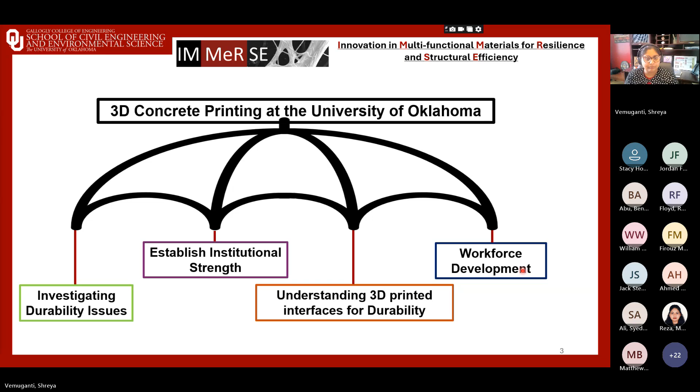Before diving into 3D printing, let's look at the current state of our infrastructure. You all know the updated ASCE Infrastructure Report Card 2025, and according to that, the report card emphasizes a C grade and D plus grade for bridges and roadways, respectively. These grades not only reflect aging systems struggling to meet functionality, but also emphasize service life expectations—meaning increasing maintenance costs, more frequent repairs, and in many cases, reduced resilience under modern demands. So we've seen these aging bridges and roadways, and they're graded poorly.

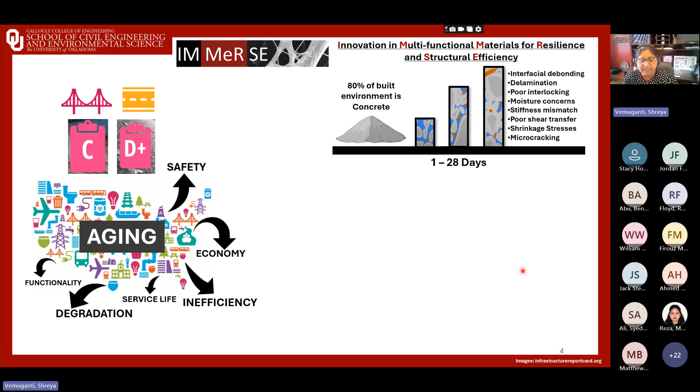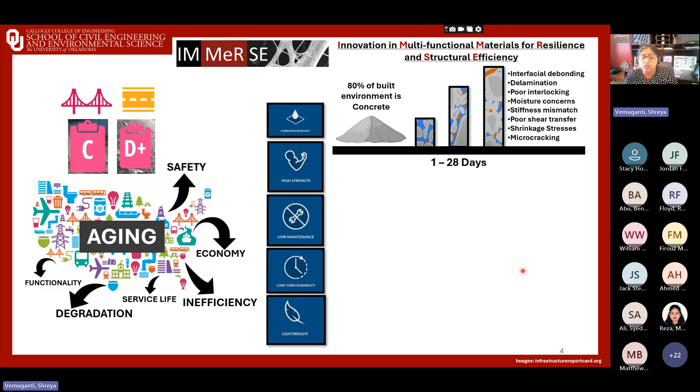One pathway forward for us is to use some advanced composite materials that are able to bring some unique advantages over traditional concrete and steel. We already have a very complicated material of concrete, which is 80% of our built environment, with tremendous complex networks inside of it. But we are bringing in some unique solutions through composite materials. These materials are corrosion resistant, high strength, lightweight, durable, and also require low maintenance. So the combination is particularly valuable for infrastructure.

We also see this in terms of the current applications of composite materials. For example, we have aerospace and automobile industries using these composites already. We also have reinforcing bars that we use in civil structures.

And the primary reason, if you look at what I'm showing here, which is called an Ashby chart, this high strength and low weight, so strength to weight versus stiffness to weight ratios, you'll see that what we call composites, highlighting glass fiber and carbon fiber reinforced composites, fall in this sweet spot compared to metals and traditional polymers. So they provide high performance, but also at much less weight.

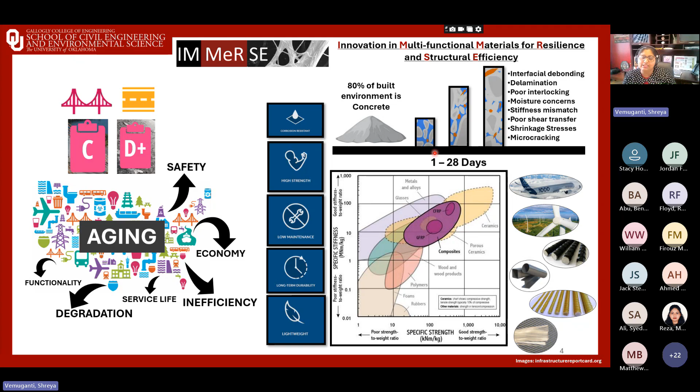And when civil infrastructure comes into consideration, corrosion resistance also becomes a really interesting advantage. So our research leverages these advantages by embedding composite reinforcement in concrete elements and studying how they are interacting with each other and how their behavior and responses change.

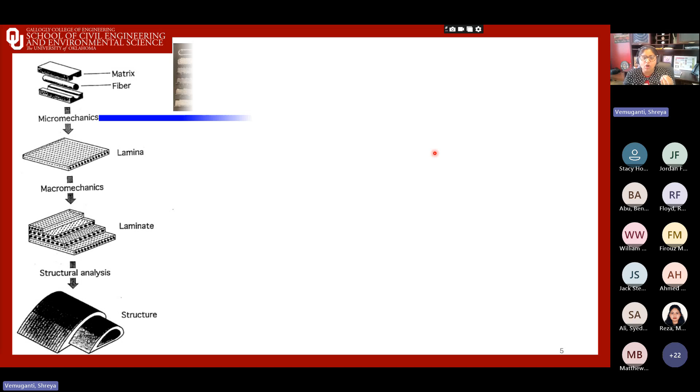So here's how we think, and when I say we, at IMMeRSE Lab and our team, how we think about our research. We are starting from the microscale of fibers and binders, and we enter the lamina and laminate levels, and ultimately up to the structural scale.

At micromechanics, at the micro scale, we look at how binders, fibers, also incorporation of nanomaterials like carbon nanotubes, how do they interact? We look at both experimental and computational modeling. What this helps us is to understand the fundamental mechanisms of strength and durability.

Then we enter the lamina and laminate kind of levels where we're moving up in scale. We investigate some reinforcement related relationships with concrete and how fabrics, grids, tapes, how can we embed these in order to improve bonding and load transfer between layers of these two unique materials.

We conduct some durability studies as well at the laminate levels, like freeze-thaw, chemical ingress, and some long-term corrosion durability setups. And at the structural analysis level, we actually look at beams, elements, and understand their performance under laboratory simulated but real world loading and environmental conditions.

This really allows us to connect what we learn at these micro and mesoscale levels all the way to the infrastructure system. So our team's strength is working across multiple scales, from material science fundamentals to large-scale structural behavior. And we integrate these into experiments and computational models.

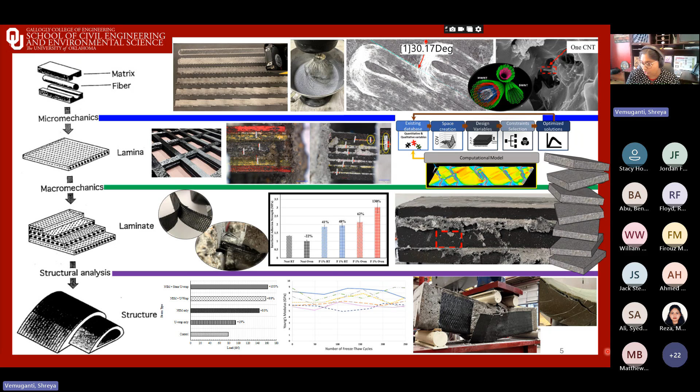So with that foundation, we apply these trends to one of the most pressing issues in 3D printed concrete, which is durability. Within durability, our emphasis is on the interface behavior, but I'll get into that more as we transition through the slides.

So I'd like to start before just diving into 3D printing. I want to introduce why it's important to understand the role of interfaces in these cementitious systems. Interfaces, either manually created or naturally existing, are often the weakest link in layered or layer on layer building concrete structures. And they could be the means to control some sort of long-term durability aspect.

So if you look at this picture I'm showing here, this is already a 3D printed structure where reinforcement is used within. There's already layer by layer building happening there, which creates these naturally occurring interfaces, which become also these cold joints.

So where we started essentially to investigate this problem is, as a first step, we created some manual interfaces. We made controlled specimens where we created manual interfaces. If you can see here, this is a very simple flexural specimen where we curated the mold such a way that we have this interface that we could incorporate some reinforcement within. So we simulated this layered construction process and we casted the concrete in stages. This allowed us to systematically study how these interfaces could be behaving.

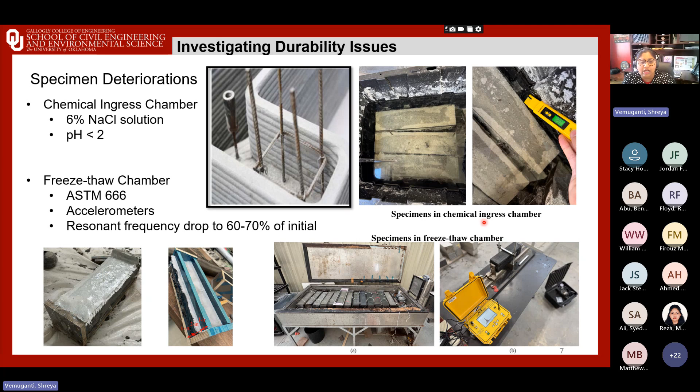These details matter because the pore size and geometry affect bonding with cement paste and also the resistance to crack growth. So we wanted to use these 3 different reinforcement strategies as variables to study how they impact the durability of these interfaces and eventually in 3D printing as well.

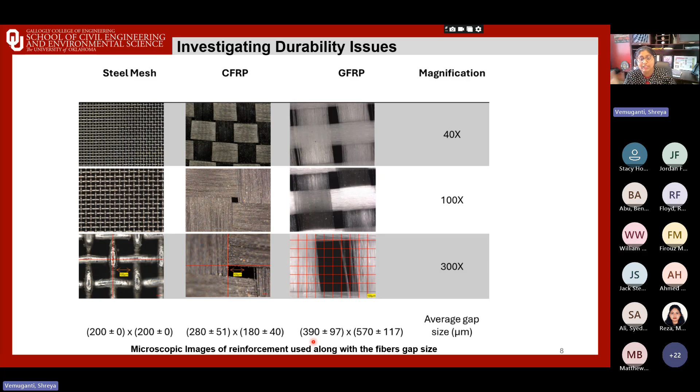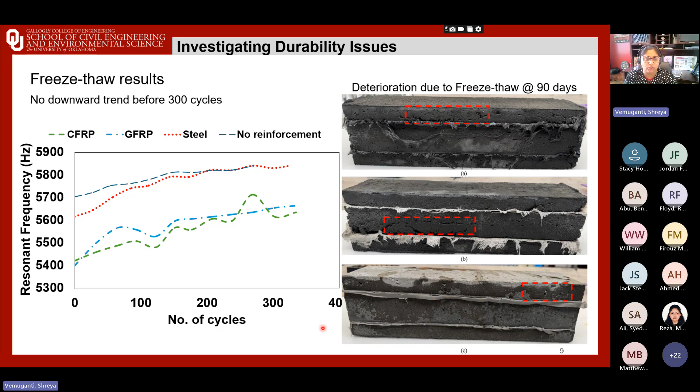These specimens observed some degradation in mechanical strength, especially GFRP. So the glass fiber reinforced polymer showed up to 56.5% reduction in the chemical ingress alone. This relates back to how chemical ingress can accelerate corrosion and deterioration at the composite concrete interface.

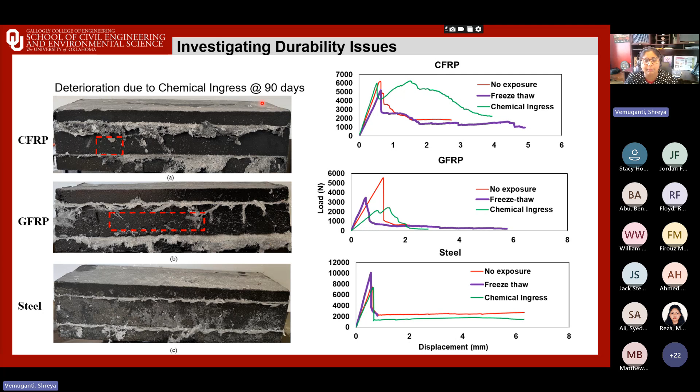Whether it's freeze-thaw or chemical ingress, the message we got from this pilot study is that these weak zones are able to inherently create deterioration mechanisms, or also accelerate them. It's important for us to understand how this affects us in the long term. These tests were conducted up to 90 days, about 3 months.

So taking this knowledge from studying these manually created interfaces under freeze-thaw and chemical ingress, the key lesson is that interfaces can control durability. Unlike traditionally cast concrete, which tends to encapsulate the reinforcement because you have that cover and the formwork, which protects your concrete during the setting and hardening process, printed elements are formwork free.

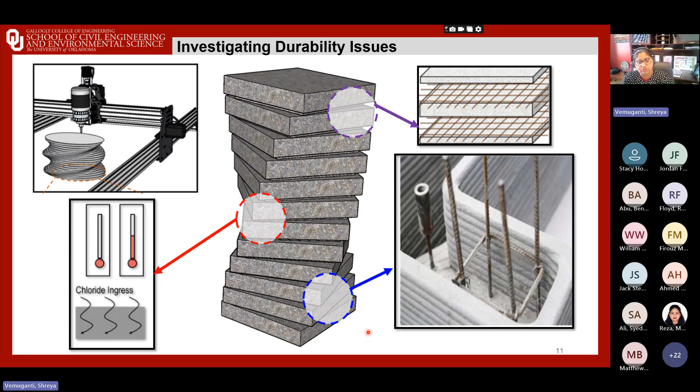So just to have this existing knowledge, problem statement, and objectives in one slide, what do we know so far? We've seen that chemical environments, and focusing here on chemical ingress, because with freeze and thaw we stopped at 300 cycles and there was not a lot of deterioration observed. So we are focusing on chemical ingress, and we might also look into freeze and thaw in our later reports.

But if we look at the existing knowledge, we've seen a reduced flexural performance by at least 56.5% in GFRP related reinforcements. So what is our problem statement? It's that 3D printed elements have naturally created interfaces or cold joints, and therefore the reinforcement incorporated at the interfaces between these successive layers may be at an increased risk of exposure to environmental conditions. So our objective is to establish this initiative, more like a program, an institutional concrete 3D printing program to investigate and mitigate these deterioration mechanisms, and understand in this particular environment what are the effects on mechanical, material, and also the durability attributes of these 3D printed elements.

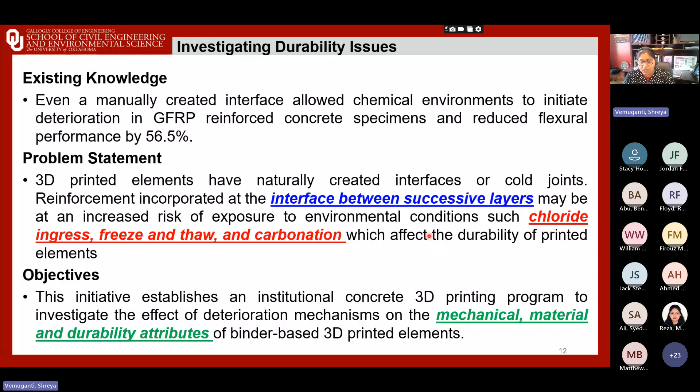So with that in mind, we'll now move into the theme of establishing institutional strength in 3D concrete printing. Here at the University of Oklahoma, we've established this particular concrete 3D printing lab in Fears Lab, and I will be running over some slides to explain that.

But why does this matter? This is not just about individual projects, but more towards building a program, and with the right tools, facilities, and collaborations that can make OU a hub for concrete printing in transportation and other infrastructure. By investing in these capabilities, equipment, testing frameworks, and partnerships, we aim to position ourselves to add to the scientific knowledge of this emerging field.

So in the next few slides, I'll go over how we created that foundation. If you already are an expert in concrete 3D printing, I hope to learn from you. If you want to know more about concrete 3D printing, I think these next few slides will help you get some interest in that. Okay, so I'm really starting from the basics.

So how did we acquire the 3D printer? We built this capacity at OU through the Strategic Equipment Investment Program. This is a VPRP initiative which supports some strategic equipment, and I'm thankful to the faculty across major schools, including civil engineering and environmental science, who collaborated on this proposal and acquired this particular equipment.

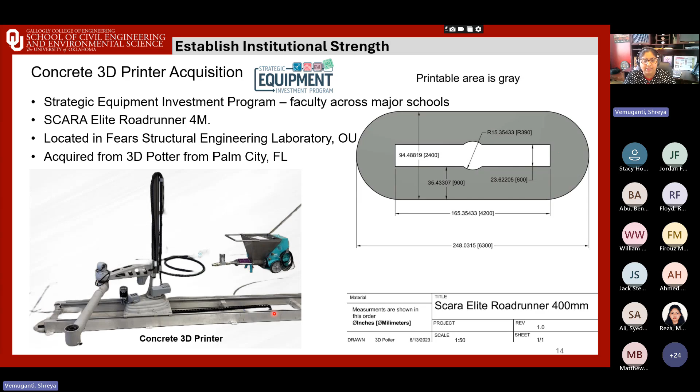So if you look at the print area here, we have about 20 feet of print area. You see in gray is the print area, and the white area is actually where the printer is situated. So we're looking at about a 5-foot radius from where the printer is located around. It can print this way and this way, and it runs on this particular rail that you see.

Really going into step one, it was unboxing. When it was delivered, the printer first arrived, and the components came carefully in a package, but we had some problems with some particular crates too. So these are some expectations, right? You have to understand the delays with these huge equipment assemblies.

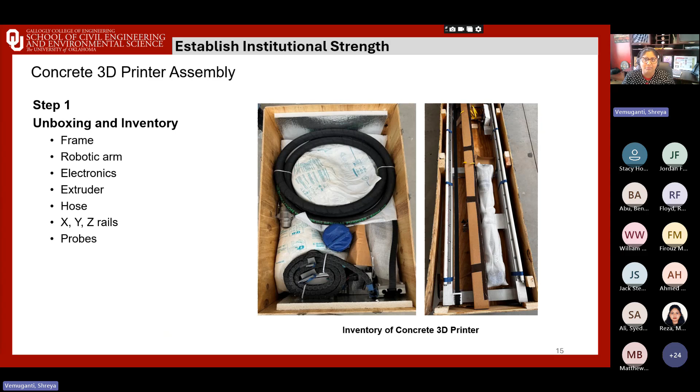You can imagine this wasn't just a plug and play setup. Each of these components had to be assembled, calibrated, and integrated into the lab space. This is where my master student, Sijan, comes into the picture, where he was on it from day one. So this slide also emphasizes it's sort of a behind the scenes effort. You see the printing, you see the videos and stuff, but actually what happened behind the scenes is a good way to also remember those moments where we had to deal with all this.

So we unpacked the components. The first step was actually laying out the base rails. You can see them still in their shipping frame, but actually aligning with the area taped out on the floor. It looks simple, but it was a bit of a challenge because we wanted to ensure the base is properly aligned, since all future prints get affected. So the smallest misalignments can get affected. You'll notice that this blue tape is what you saw in the previous plan before. It's like the envelope that we create to actually be able to print.

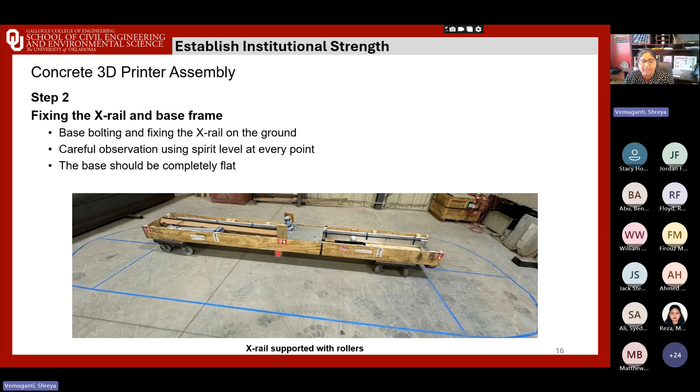This particular stage also demonstrates how accuracy in the assembly directly translates to print quality. Any misalignment in these systems would result in layer shifting or poor bonding between passes. So all those we learn as we trial and run multiple trials.

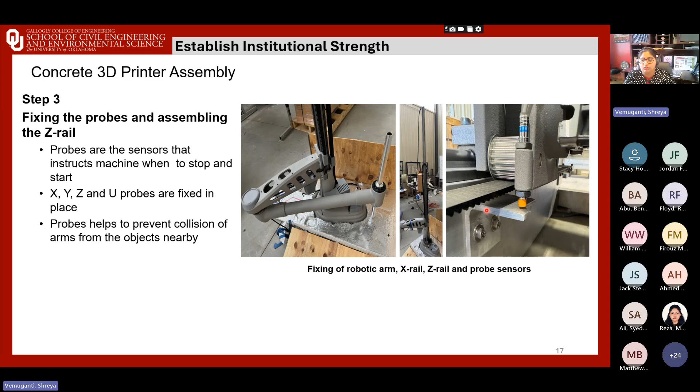But it's simple for me to say now because we've seen all that. So if you see this close up on the right, you can also see the belt drive that moves the carriage. This allows for controlled deposition and consistent extrusion through the nozzle. So this is all essential for printing the specimens.

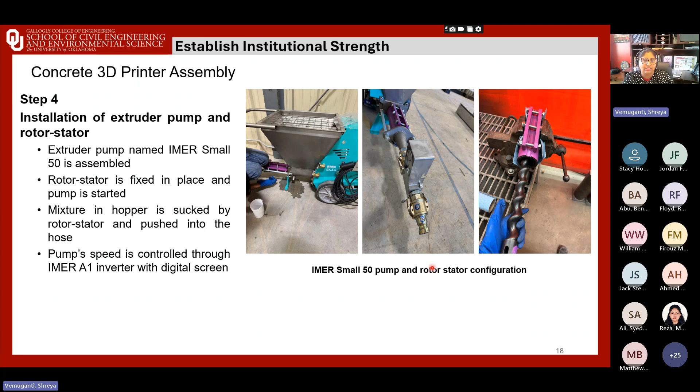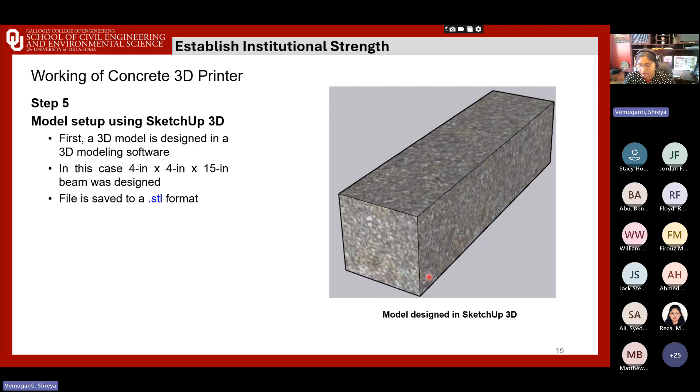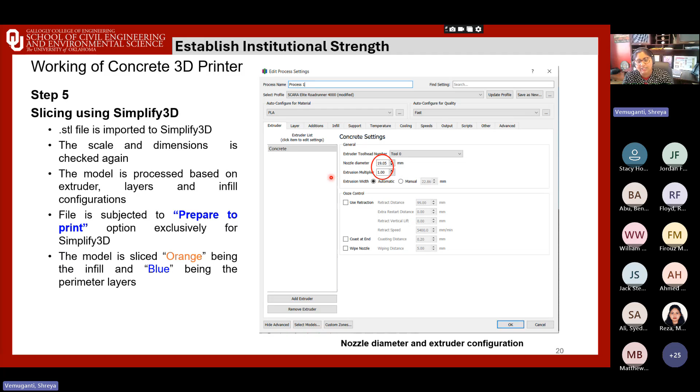We learned a lot during this process, and again I have to give it to the students who worked on this constantly. So from plastic printing, which I was majorly focused on in my dissertation studies, to coming to this concrete 3D printing, it was a lot of a learning curve, because rheology, yield stress, setting time - all these parameters do not necessarily affect a lot in plastic 3D printing, and it's not a thermal relationship. So it was a huge learning curve.

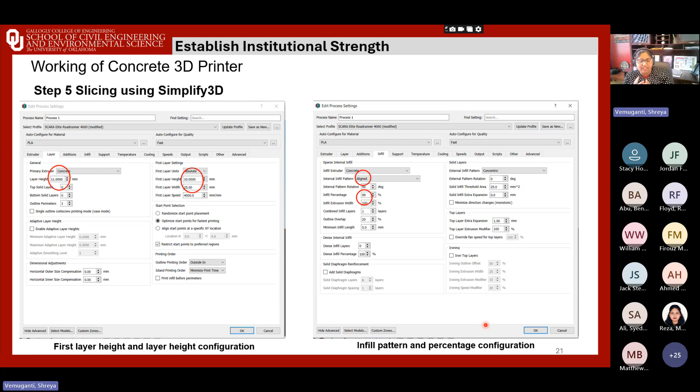So when you print layer with this concrete 3D printing, unlike plastic 3D printing, there is no fusion between the layers. There is more of a mechanical interlocking between these layers. So infill pattern and layer height are very, very key to establishing this strength.

So we started off with this particular infill pattern. Now, of course, a zigzag pattern would create much more of an interlock. We started with this pattern because we also wanted to look at, in our first trials, buildability.

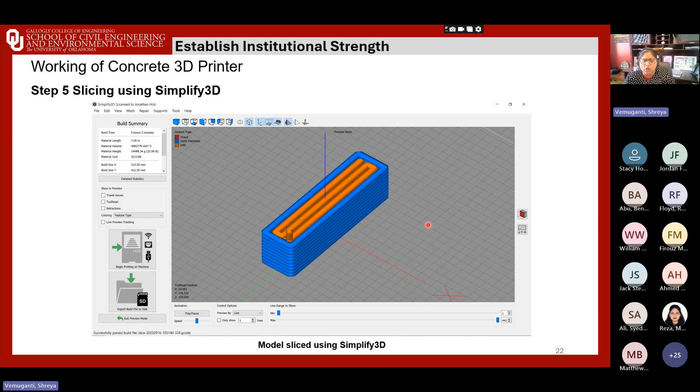This is a straightforward inline extrusion path. It helped us really understand buildability. I will show you in another picture later. But the aligned layers allowed us to observe how the mix held the shape, whether layers stacked without collapse, how the nozzle motion translated into the actual deposition of this concrete mix. So a lot of confidence gaining sort of trials.

3D Potter itself has their interface for 3D printing. So the Simplify 3D, when it generated the G code, you essentially upload it into the 3D Potter interface and you finalize the print path and the machine interface and all these parameters. And that's also, I do agree they were a lot of help during the understanding of this online workflow itself. So again, a bit of a learning curve, but I think with the right manufacturer and also the right team, it's very much possible.

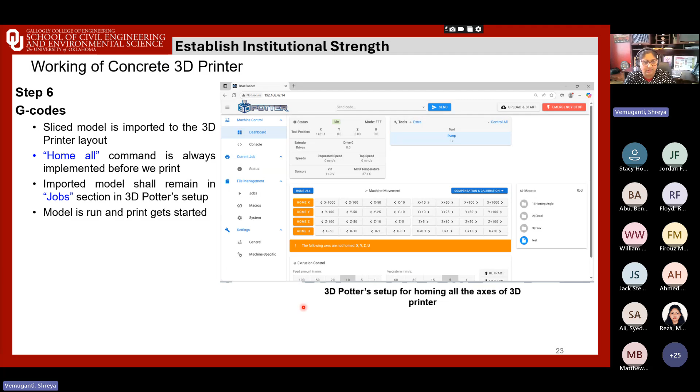So concurrently, while we are assembling and calibrating the printer, we also started on one end with existing experiences of concrete mix design itself. We started material characterization to ensure our mixes were printable. We did not have printable mixes. We had to develop those mixes. We cannot use some mix that is already produced by, from literature. We could not actually understand how our printer would be able to print that particular mix.

So it's very important to develop your own mix. You might have local materials, you might have materials that are locally available to you. The gradation is different, the maximum aggregate size is different. So we have to ensure that mix is developed first.

So standard procedures were followed. You have ASTM C1437 for the flow, setting time C191. And these tests gave us early insights into how the material would perform, with this nozzle extrusion and stuff.

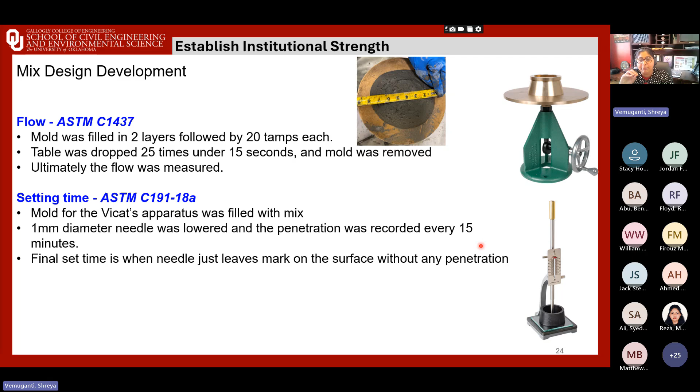One of the key challenges in both these aspects was balancing this workability, but also for strength. So the next process we did is, in parallel, we made sure these two material properties were in line with the compressive strength. So there were some baseline compressive strength results that we established, and how flow and setting time can be achieved for those sort of compressive strengths. Our goal, yes, is very strong mixes, but also it's important to see this three-dimensional problem with pumpability, buildability, the flow, the strength. So there are several parameters that are coming into play all together.

So this is something we are showing here. We've made cubes here, one of our very initial sort of specimen fabrications, and we used a compressive strength machine, the Forney, to get these results.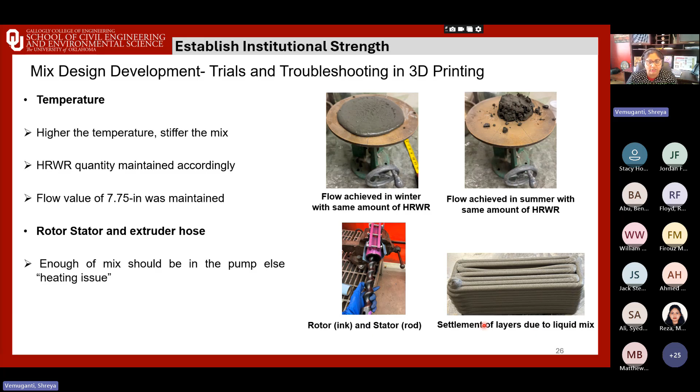So our final mix essentially had pozzolans, high range water reducer, water, and also fine aggregates, which are 90% passing. I am not mentioning the exact particular ratios here. Our final report also has that. And we are still working through this. So you'll have more and more reports to be able to see that information if you're interested, or I'm absolutely happy to share that information and what we have here.

We have to tailor those admixture dosages for flowability, durability, and buildability. So we ensured that 90% passing of fine aggregates through a 1.2 millimeter sieve was used.

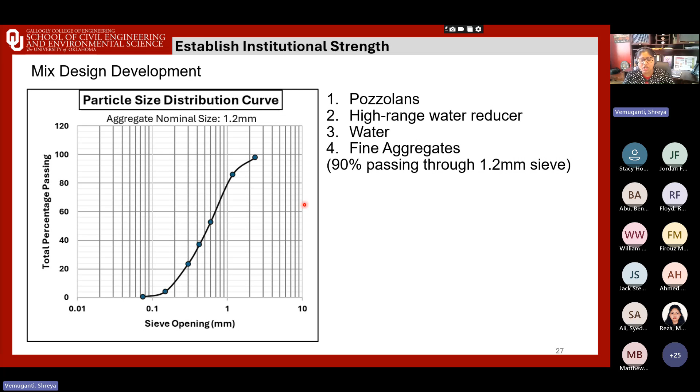And if you see, at least 50% is passing through 700 micron. So this was the final mix, and the final parameters we achieved through this mix were: the initial setting time was 120 minutes, and the 28-day compressive strength was about 78 MPa, like 11.5 KSI.

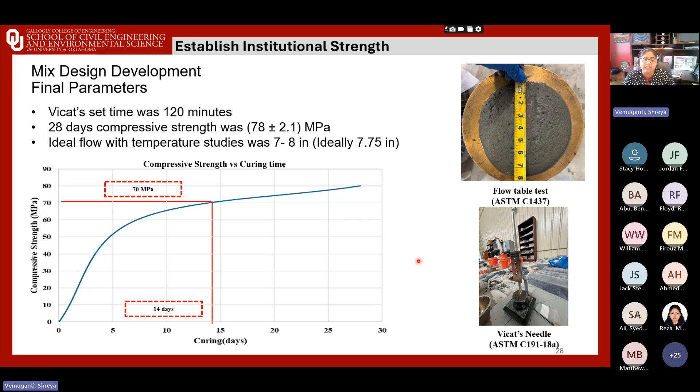For ideal flow, with temperature studies in mind, we always shoot for a 7.75 inch flow table measurement. 7 to 8 inches is the range we've established, but in our prints we always target 7.75 inches. By systematically connecting these fresh state properties with print outcomes, we've established the final parameters we always use during the printing process.

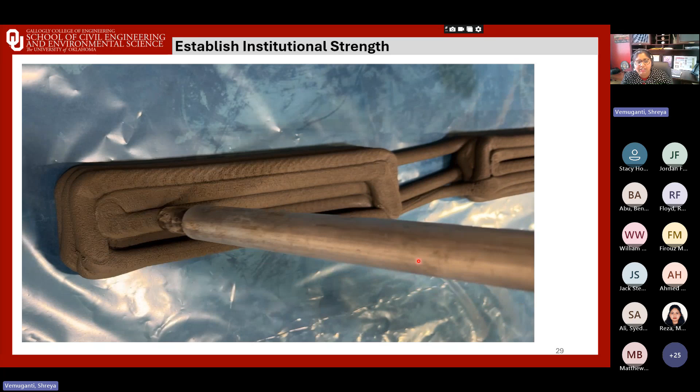So here's something exciting. After establishing that baseline, we made some simple experiments. Like I talked about, buildability was key for us. So we synchronized material rheology and print speeds, at what rate the pump can pump the material, and at what time we see drying in the mix, or any air pockets. It was a highly curated, balanced validation of both our mix design workflow and the hardware setup.

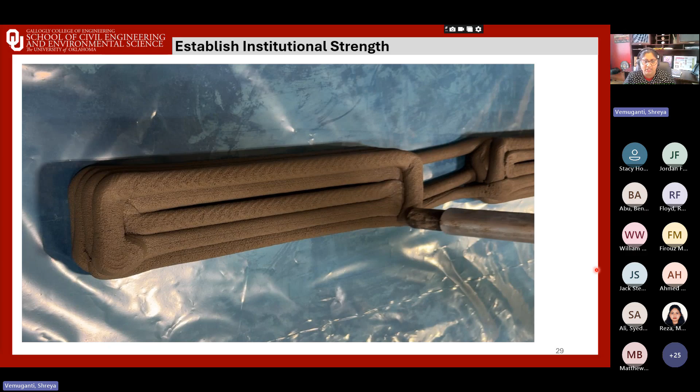The pumping rate and speed were quite a challenge. We attempted something symbolic: printing our OU logo. It was not just a test of accuracy and control, but we wanted to understand how this 3D printer can move beyond simple geometries into more complex, and even further complex shapes that could be printed using this printer. Main thing is customized geometries.

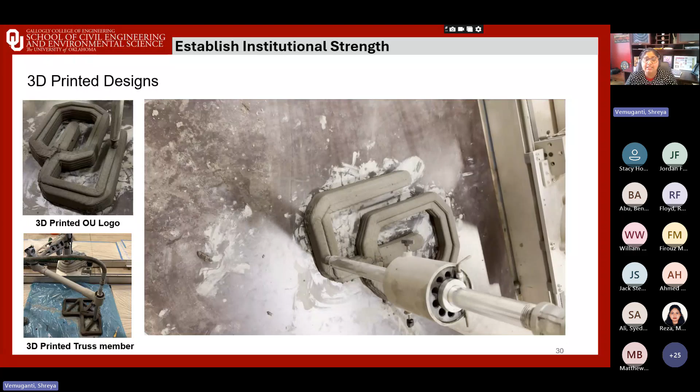I remember how our student came up with these designs in SketchUp 3D, and we had to rescale them. The Simplify3D wouldn't accept it, the G-code wouldn't accept it. So it was sort of a learning curve.

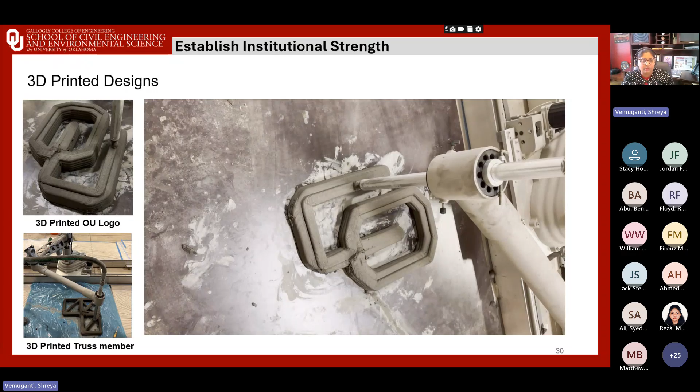With our institutional setup in place, the next step was to focus directly on understanding these 3D printed interfaces. This is an ongoing study, but I'll present a lot of videos and pictures we have so far. We had the printer fully set up, our mix design optimized, and we did some successful demonstrations to see if everything was working the way we wanted it to.

At this point, we shifted our focus to asking some deep scientific questions. The key is to investigate these deterioration mechanisms and their effect on 3D printed concrete elements. We performed these studies at 60 and 90 days. We're not there yet, but we'll still show you some observations we have.

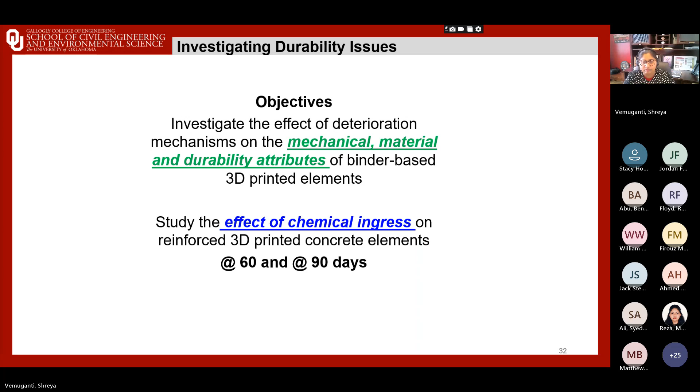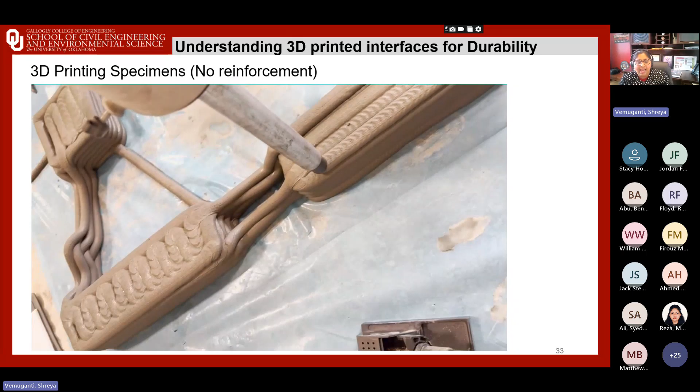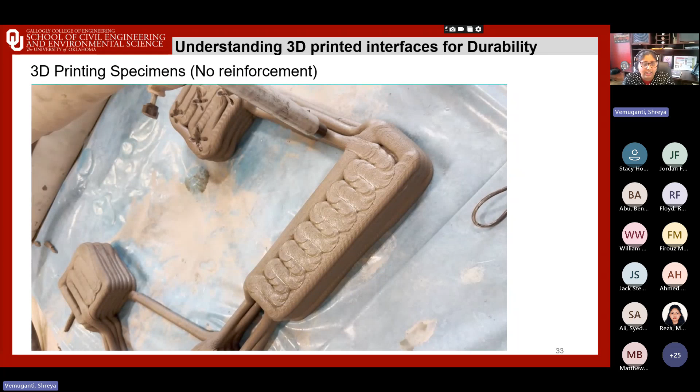Okay, to start with, we began the no-reinforcement 3D printing. If you remember from the manually created interfaces pilot study, we looked at different scenarios with reinforcements. What we did first with our 3D printing is we essentially printed this block. You can see it's a combination of both the aligned and zigzag infill pattern. It's a really good video showing how tightly these layers are together, and how this zigzag pattern creates an interlock with the existing layers and boundaries.

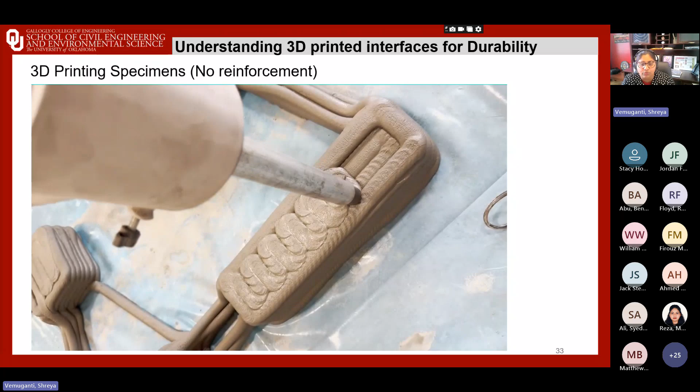Please also notice in the next slide these visible interfaces. This is after the hardening process. You see a close-up of the 3D printed specimen, and each of these ridges represents the layer-to-layer interface. This doesn't look like the way cast concrete looks, right? In that case the material is monolithic. The 3D printed elements, however, are fundamentally a layer-on-layer build-up.

You can see there are still some irregularities in printing, but just by observation you can identify some weak seam lines, and the bond quality of these joints dictates the structural performance. So it could fail prematurely, but it could also be designed. In our case, we want to put reinforcement in these interfaces. You see some subtle gaps, and some roughness during deposition that could help with friction. But over time, what we saw is how these interfaces, when you place reinforcement in there and subject it to chemical ingress, what could happen at these interfaces.

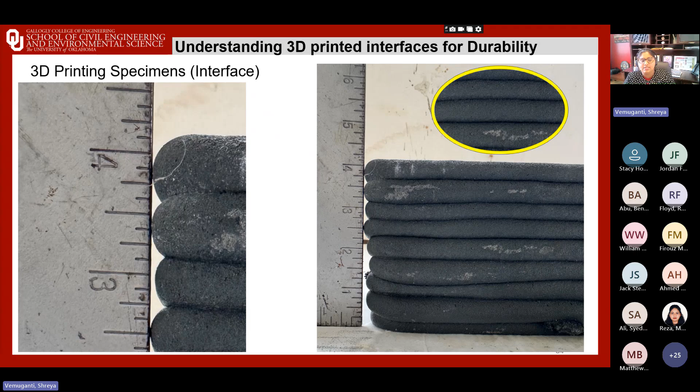Going back and remembering those reinforcements that I discussed earlier, we use 4 types with different properties, fine grade and more of a woven fabrics versus coarser patterns. We use the reinforcements as is, and also use them with resin. Resin sort of becomes this impenetrable barrier, which gives us a good strategy to see non-barrier related specimens versus barrier-including specimens.

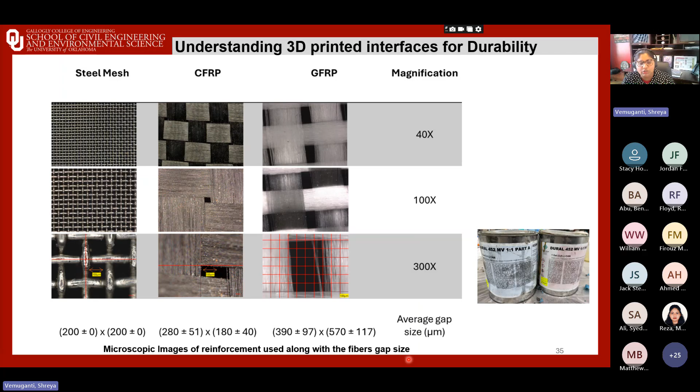If you notice all these reinforcements, we use microscopes to actually get the opening size. That gives us a variable between different reinforcements and different opening sizes. This can also give us a relationship between bonding with the cement paste, because there is eventually some transportation of moisture from layer 1 to layer 2 that is built on top of it. These variables can help us understand this.

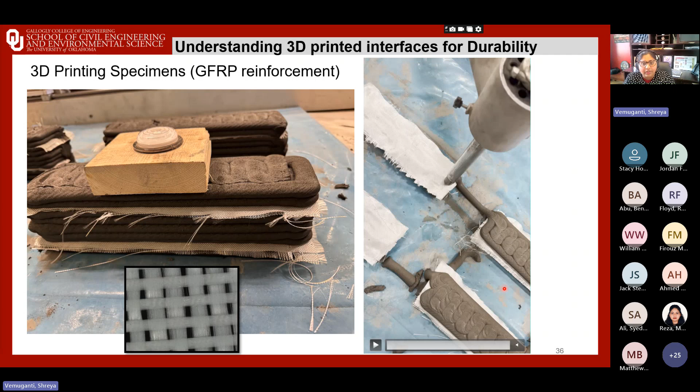When we look at this continuous reinforcement printing, these interfaces, you see that they remain visible, and they are potentially those permeable interfaces, but we can learn more when we look at those observations.

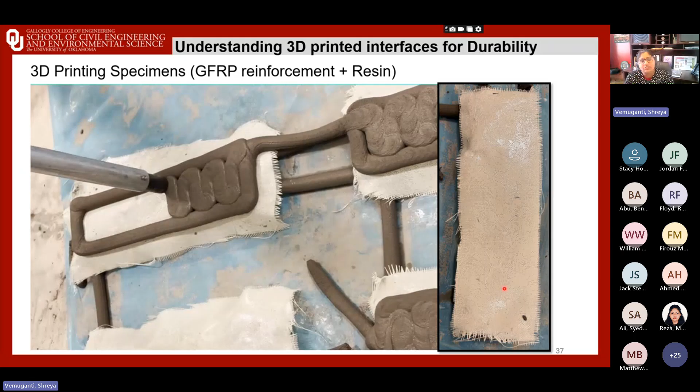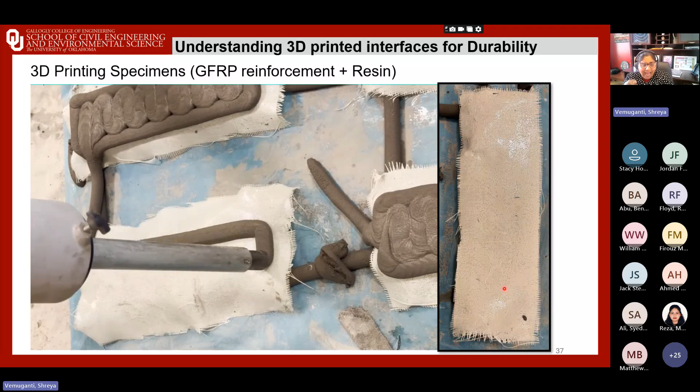In this particular video, you see the same GFRP reinforcement, but what we did is we saturated it in resin. So it's not a wet layup on the printed specimen itself, but a pre-saturation that we did, removing any excess resin that is already pre-mixed with hardener. Then we've placed these fabrics on top of the beams at those design interfaces and printed the next layer on.

So you can clearly see how this fabric is laid. Of course, we had to ensure there is more fabric than needed because we didn't want the fabric to fall off during printing, since the nozzle is moving and has this vibration effect.

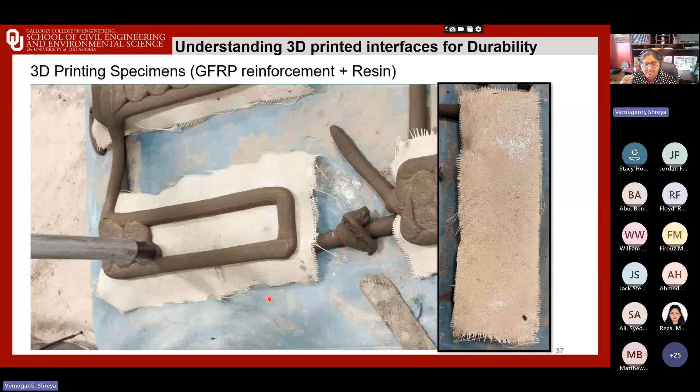We also saw in the pilot study that carbon fiber didn't necessarily have too much degradation compared to glass fiber. So the goal was to compare GFRP and CFRP in these printed interfaces, but also ask a bigger question: if there is an inherent higher stiffness in the CFRP, does it offset that environmental risk, or is the vulnerability lower? If not, if it's only the interface that is dominating, then we need strategies to improve that interface.

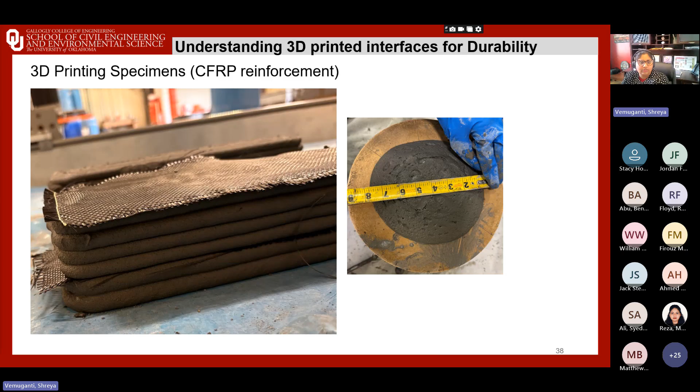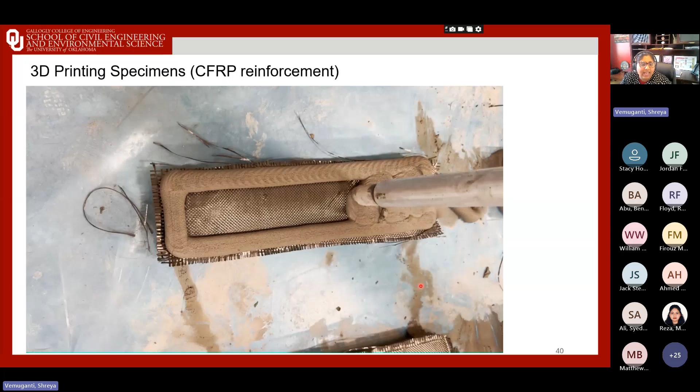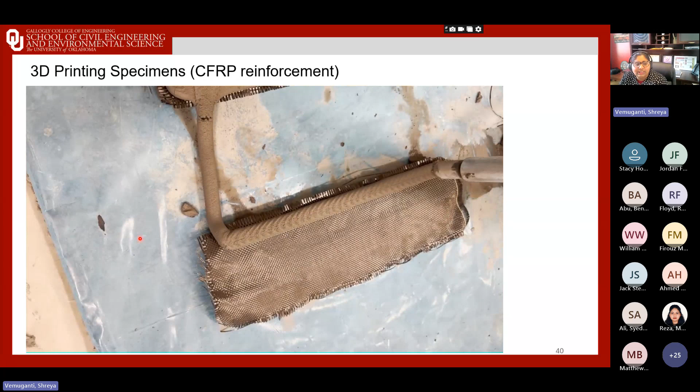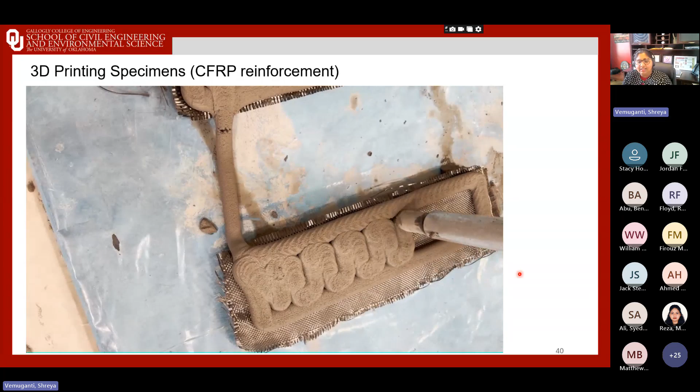So here you see the carbon fiber placement itself, again bottom second layer and top second layer. A very interesting parameter to this printing is that there is no external compaction applied to the layers, right? The nozzle itself, when printing, provides that inherent compaction as it deposits the material. This creates pressure that actually stretches this embedded fabric during printing. The stretching is important because how the reinforcement is anchored at the interface gets affected, which will influence the bond quality and long-term effects we are trying to look into.

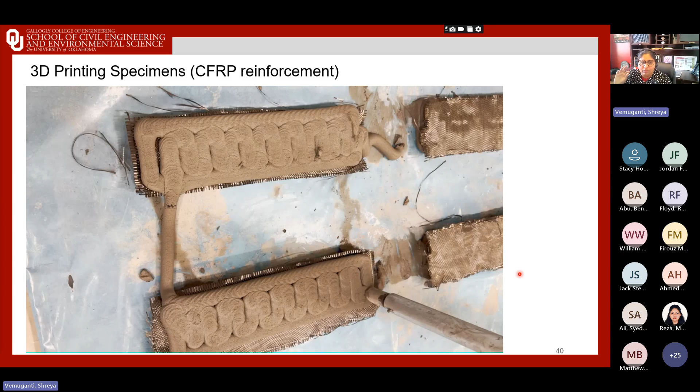With chemical environment, one thing I like to understand from this video is it's a reminder how this advanced 3D printing technology, the deposition process, is really tied to not only the material, but also what's happening at the interface, what we are using at the interface. So this is all a tetrahedral problem, if you can say it.

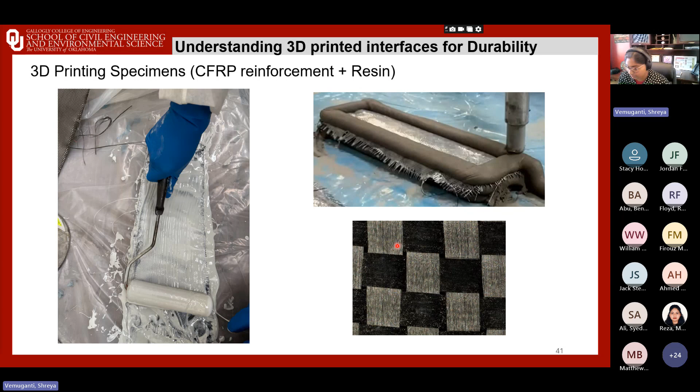This again is the CFRP, but with resin, just like we did for the GFRP. If you can see here, this is that rolling process. When you dip the fabric in the resin, it's purely saturated, right? You don't want so much excess resin in those interfaces, so we are essentially using rollers. This is what we do in the wet layup process, but we do it to make composite laminates, laminas. But we did this sort of a pre-3D printing process. We saturated it with resin and made sure there's no excess resin, and we laid it on and the printing sort of goes on.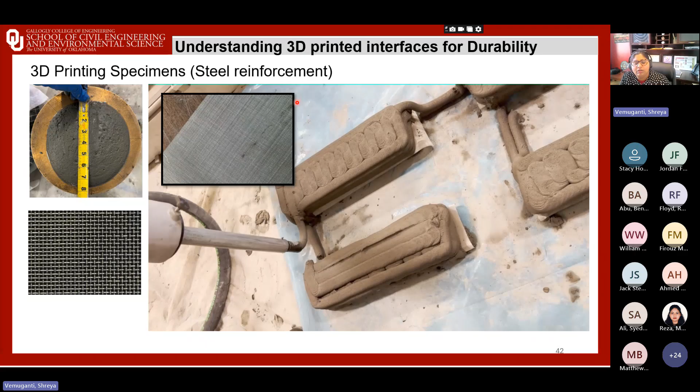This particular one is the last one of our interface reinforcements, which is the steel reinforcement. It's important to understand steel reinforcement performance as well in these aggressive environments because it sort of gives us a benchmark. It's FRP versus steel, not necessarily, but we are trying to also understand how maybe this grid size could affect it. If you see steel, this is such a stiff mesh that we obtained, right? So during compaction, there's no stretching or effect of the nozzle compaction on the steel itself. So it's already very stiff and provides great strength. But because there is no effect under this compaction...

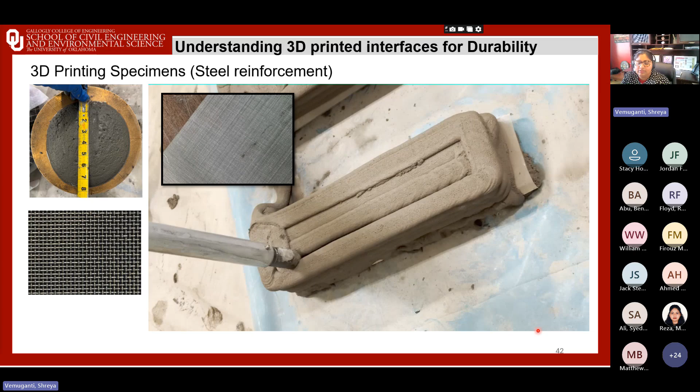Maybe the sharp discontinuities can affect the overall printed element. We don't know yet, so we're trying to understand those aspects, but steel definitely provides that excellent strength and stiffness. So it's very important for us to understand too, as to if this can help us maybe tackle that durability problem. So now we're getting into the consequences of these exposures.

So what we did here is you have the left side, or in all the rest of the slides, the left or top slides will be the unexposed, and the right side would be the exposed. These are chemical ingress related specimens, 6% NaCl solution, maintaining pH less than 2 every single day. We are trying to understand the 30-day and 90-day sort of exposure. Here are the 50 days physical observation. We took them out of the chemical ingress bath, took pictures for this particular presentation, and put them back, so they are sort of wet. You can see that dark contrast too.

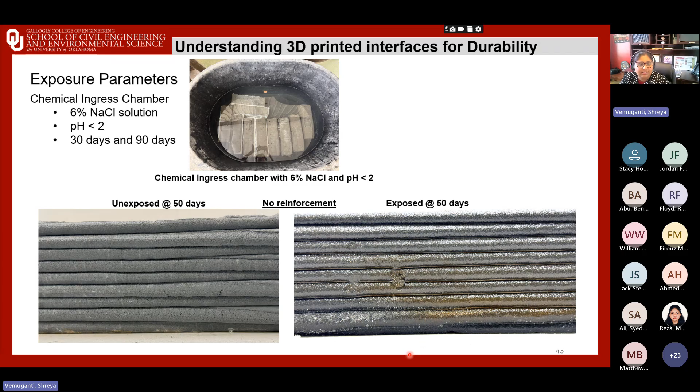Now, if we look into these pictures, this is no reinforcement, right? We don't have any reinforcement at the interfaces, but there is, of course, some visible discoloration, and the surface also appears a little more pronounced. There is this at-the-interface more predominant discoloration than away from the interface, but it's again too soon to tell. 90 days might have more significant effects on the interface. Interestingly enough, if you look at the GFRP specimens that we put into the chemical ingress, the unexposed ones didn't show any discoloration.

There were, however, some on the chemical ingress specimens, some white deposits along the bottom interface. From our past studies where we've done some durability studies, we've seen ettringite being pushed out of the concrete itself because of the chemicals present in the chambers, especially sulfate and chloride rich. So these expansive ettringite can form and migrate towards voids and interfaces, and there is literature also to support that layered or cracked regions can act as preferential outlets for ettringite crystallization. So maybe they might be accessible pathways for moisture and ion. We are trying to investigate more into that.

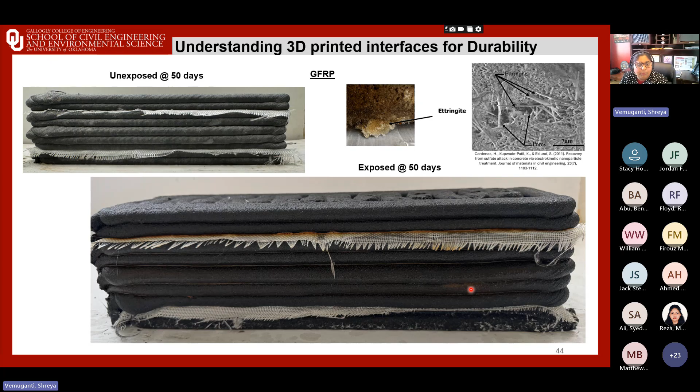This is a past study where they are showing these crystal-like structures. You don't see it more predominantly here, but you will see it in the CFRP ones, more pointing outwards.

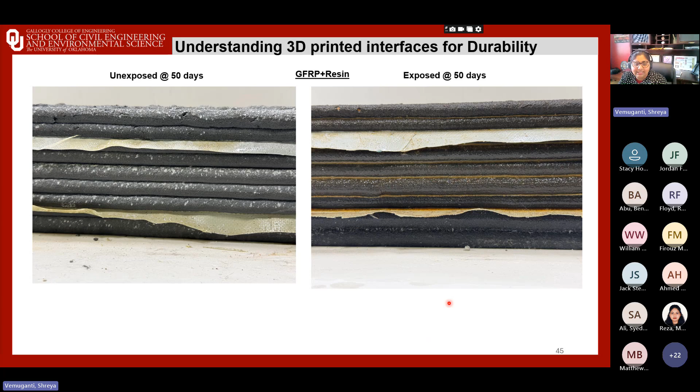This one is the GFRP plus resin. I'm going to run through these slides quicker. You see this discoloration as well, some sort of ettringite being pushed out, not too predominant, maybe because the resin is helping sort of be this barrier towards the chemical ingress. But if you see here, the interface is without the resin, because resin was only used in the GFRP interfaces, right? So for the others, there is pronounced discoloration happening. This could also mean leaching, oxidation, sort of a process that is happening at those interfaces. But overall, the takeaway message is that there is action happening at the interfaces.

So the CFRP really showed out those ettringite crystallizations. Of course, remember that the CFRP fabric itself is dark colored, so it's difficult also to see what's happening. But we do see, again, some discoloration at some of these interfaces and presence of ettringite.

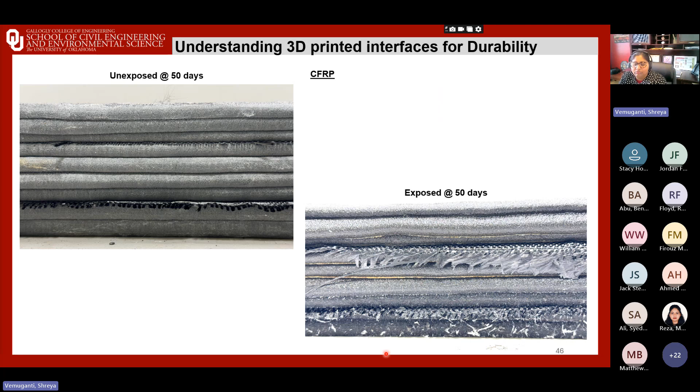In the CFRP plus resin, this was actually the best looking specimen so far at 50 days. It's an encouraging sign that material selection and surface treatments can be tuned to provide some durability of these printed interfaces.

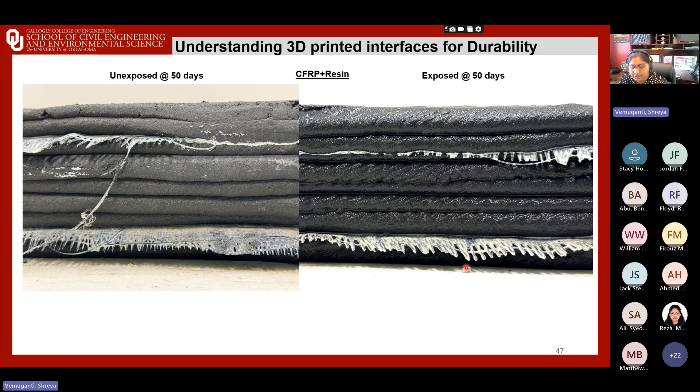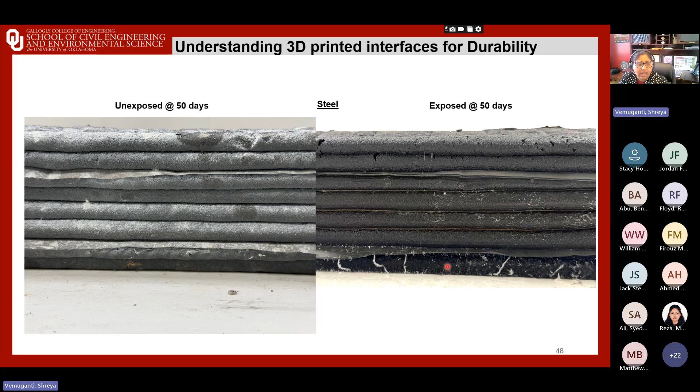With steel, we saw some discoloration and staining. Again, we did see some ettringite crystallization as well. There are some pores observed on the top surface, but this would also be related to the 3D printing aspects.

Just trying to mismatch these layers of interfaces - can we reduce the exposure risk to the reinforcements within?

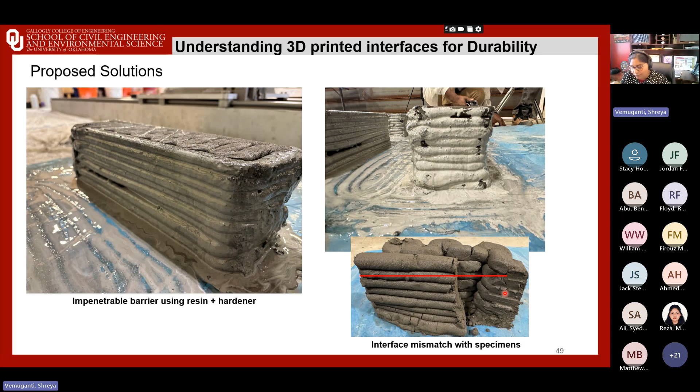One important aspect, which I'm afraid I have to run through very quickly, is workforce development, which is one of our major themes in this umbrella of 3D concrete printing. We want to highlight how this research can engage and train the next generation.

So we are trying to meet students where they are, bringing advanced material related research into their classrooms and labs. With one of these schools, we established a relationship to actually bring students into the lab as well, so they're mixing, testing, and some are running the equipment too.

Very exciting, and it's more tangible, right? They are also seeing all these things first person. This sort of engagement, we hope, really builds curiosity and creates some early pathways into STEM and infrastructure.

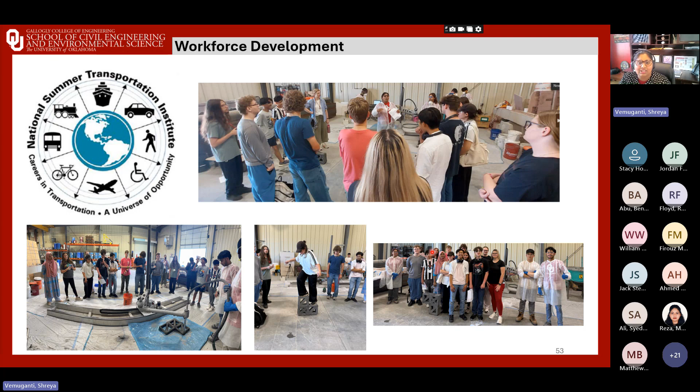In this presentation, I also want to highlight this survey that we conducted through the NSTI workshop. The impact of our research can truly be determined through such surveys, because it's a pre and post survey that we did during the 3D printing. There is clearly a shift before and after the program.

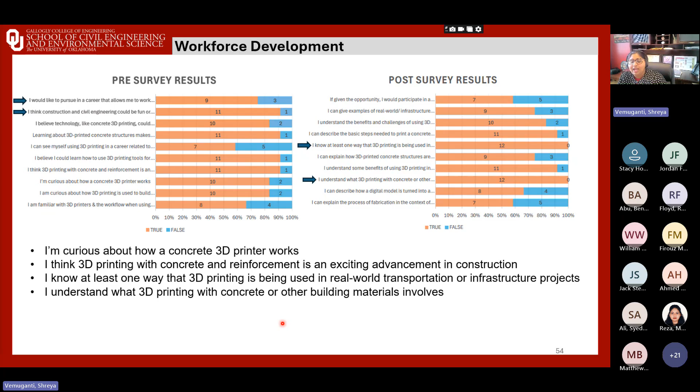For example, only a few students saw themselves using the 3D printer in their career, but after the 3D printing session completed and we conducted the post survey, almost all could explain some benefits and applications of how we went through this work process. We were really happy with the opportunity to expose them to hands-on 3D printing, and to see the dramatic shift in student perception.

Finally, I also want to take this opportunity to explain the workshop we are conducting. We are scaling this work to undergraduate research experiences as well, beyond middle and high school students. We're bringing in this program with undergraduates across OU for now, but hopefully in the future to the entire Region 6.

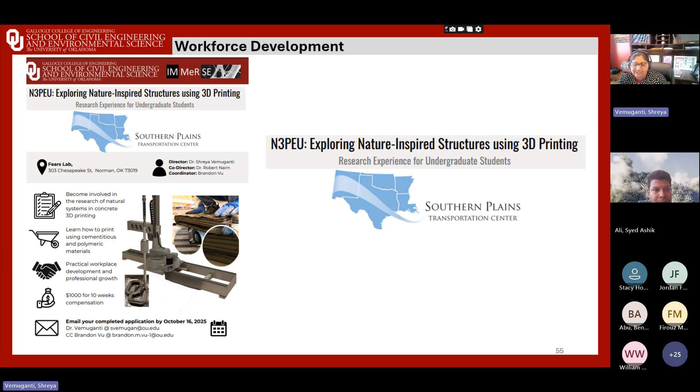The key takeaway is these undergraduate students working together in the workshop on 3D printing problems. Our workforce development activity really wants to push efforts toward creating the next generation of engineers who will design, print, but also maintain the future of our infrastructure. I think that's key for us, and also the goal of SPTC.